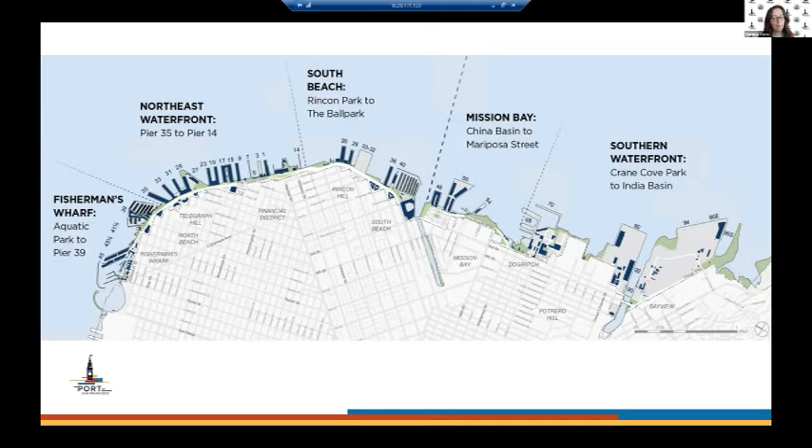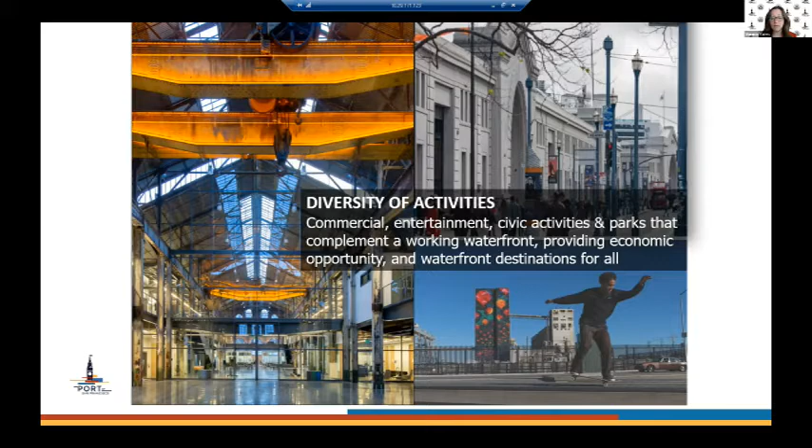So we support diversity of activities at the port, and that all complements a working waterfront and provides economic opportunities. Our working waterfront is along with commercial, entertainment, and civic activities, and a lot of parks. It's easy to forget that we are very much also a working maritime port. While we're a working maritime port, we are balancing public access to our maritime berthing on the piers. We're also working to expand water recreation and promote industrial economic development to protect the integrity of our southern waterfront cargo terminals.

And all the while we're doing that, we're looking to promote maritime environmental sustainability. One of the ways we're doing that is adding clean electric shore power to support the cruise industry.

So we have a wonderful, robust network of waterfront parks and open space, and it's mostly complete along our 7.5 miles of waterfront. And because it's mostly complete, we're focusing a lot on enhancing the recreational use and value we get from all that open space by having park activation and events.

We're adding wayfinding to provide information about all of our open space and to help guide people through it. That includes interpretive exhibits about port history and maritime industry. One of the projects I'll go over does support that goal. And all of our improvements contribute to the Bay Trail and the Water Trail that go through our property.

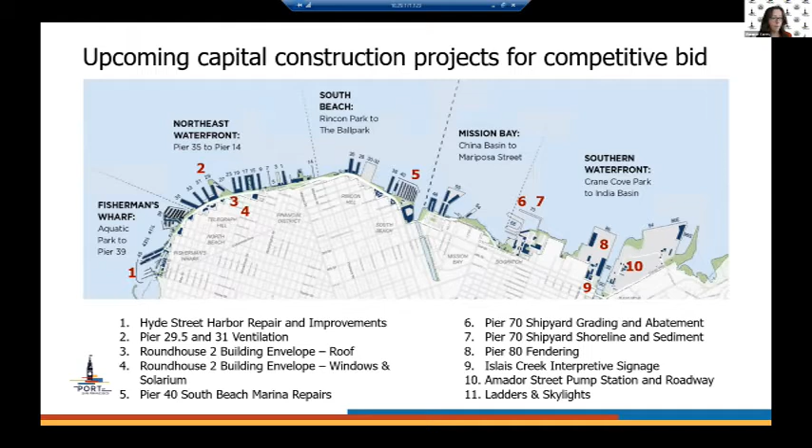So talking about each of these individually, going back again to take them in the same order from north to south: the Hyde Street Harbor and Repair Improvement Project addresses deferred maintenance at the Hyde Street Harbor. The scope to address that deferred maintenance includes concrete repair, welding, wooden whaler replacement, dock hardware replacement, pile sleeves, concrete float repair, and potable water line replacement. We plan to advertise that pretty soon in June of this year, and we estimate construction costs at just over $1 million.

Next project to the south is the Pier 29.5 and 31 ventilation project. This is to install a new ventilation system there. We have public parking in this area, which is why we need ventilation. The scope is mechanical ventilation, structural supports for this system, and electrical work for the carbon monoxide sensors. We plan to advertise that in September of this year and estimate construction at about $1.5 million.

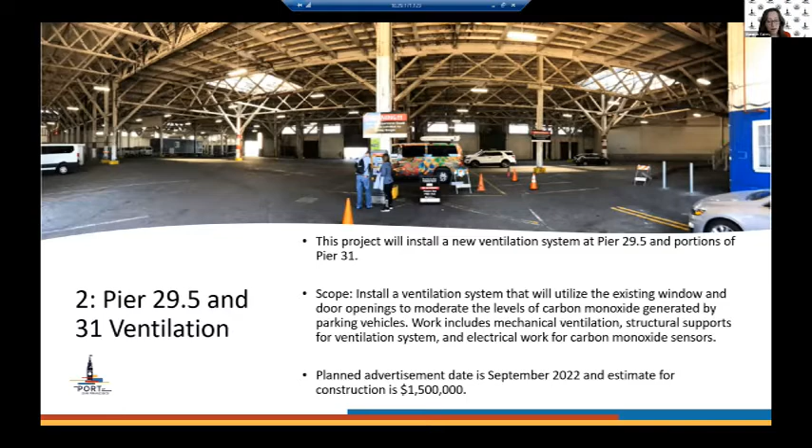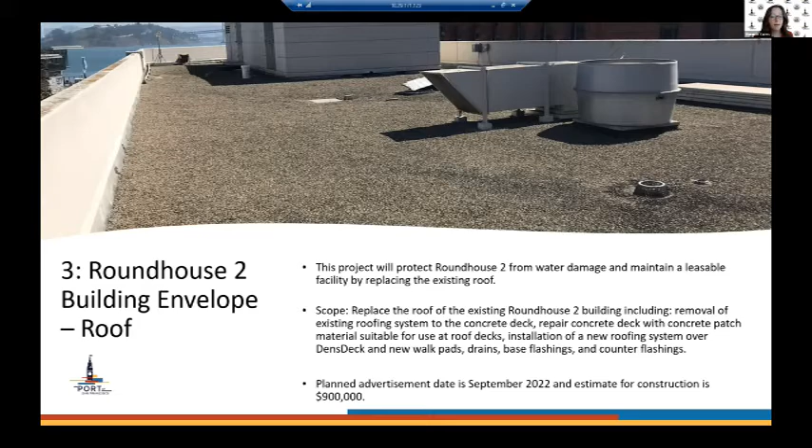Moving to the two Roundhouse 2 projects: there are 3 buildings in the Roundhouse complex, and this addresses the most recent one. It's a historic complex, but Roundhouse 2 is actually a building that was built in the 80s, though it's part of the whole historic complex, which makes it a little more complicated to do work on. The first Roundhouse 2 building envelope project is a roof replacement. The scope is to replace the roof, which involves removing the existing roof to the concrete deck, repairing that concrete deck, and installing a new roofing system. We plan to advertise that in September of this year and estimate construction at about $900,000.

The second Roundhouse 2 building envelope project is replacing the solarium and windows because water is coming in from all of these locations. The top photo shows the solarium; it's a pretty cool component of the building, but it does leak, so we're going to replace the entire solarium. The other thing is to replace the windows—the bottom picture shows there are a lot of windows in this building, and they need to be replaced since they've reached the end of their useful life. We plan to advertise this project in March of 2023, and we estimate construction will be about $5 million.

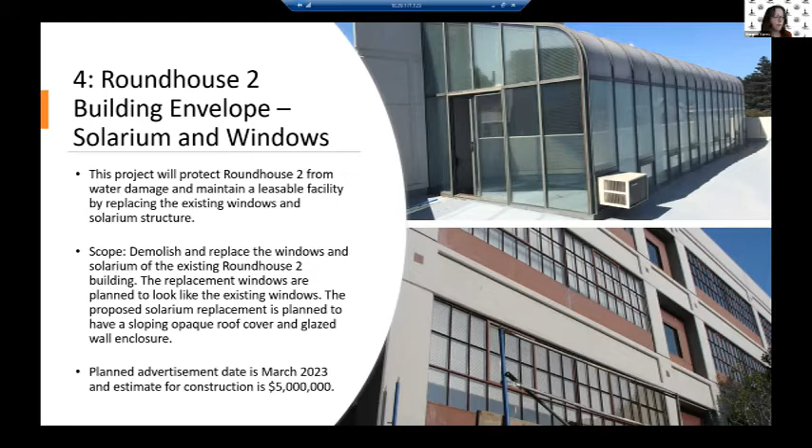Jumping much further south now to project number 5, which is the South Beach Marina Repair and Improvements Project. I think of this as a sister project to the Hyde Street Marina Repair and Improvements. We plan to advertise these separately, but they're going to go concurrently. This one will also be advertised in June 2022, and its construction estimate is a little over $2 million.

Now, starting our two Pier 70 shipyard projects. This is the grading and abatement project. The scope is to remove an underground pipeline that's no longer in use and is contaminated by PCBs, then regrading existing soil stockpiles on site. This picture shows those piles, which we'll use to regrade the unpaved area and cover it with gravel to create a level surface with positive drainage. This one's going out really soon. We're expecting to advertise it next month, and the estimate for construction is $1.3 million.

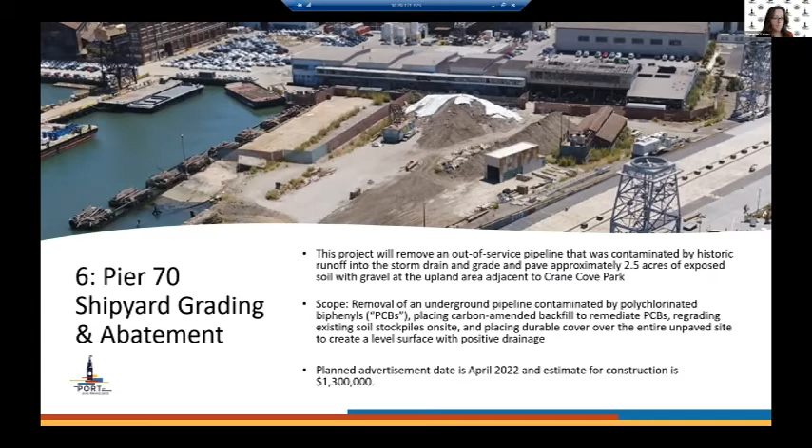The other project in this same location is the Pier 70 Shipyard Shoreline and Sediment Project. This is providing stable cover for the exposed shoreline just at the edge of the area shown here, near the piles of soil. We're going to install a shoreline revetment in front of those slipways, involving marine construction and in-water surveying. We plan to advertise that in April 2023 with an estimate of $1.2 million for that work.

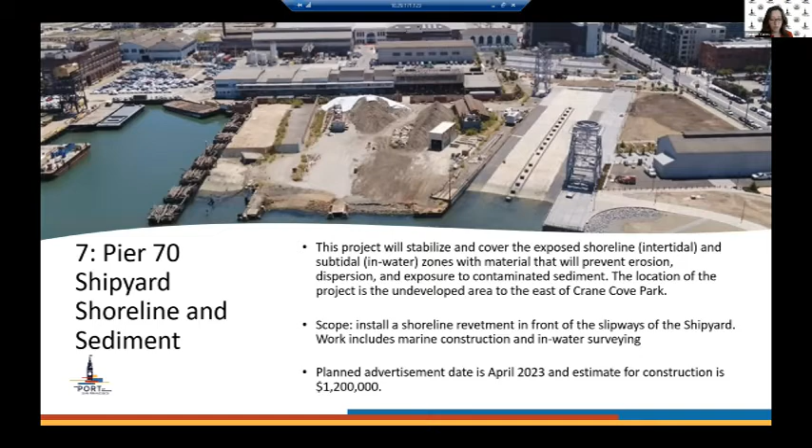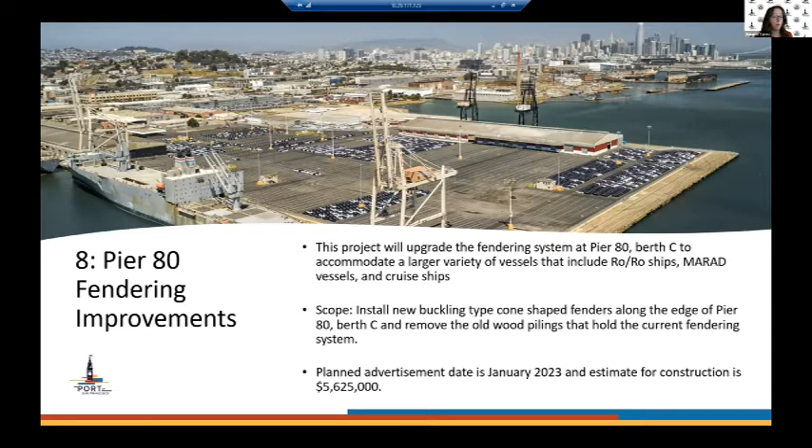Project 8 is Pier 80 fendering improvements. You can see this picture of Pier 80 with cars parked here. The project is to upgrade the fendering system to allow for a larger variety of vessels, including roll-on roll-off ships, MARAD vessels, and cruise ships. The scope is to install new buckling type cone-shaped fenders along the edge of Pier 80 Berth C and remove the old pilings. We expect to advertise this in January 2023, with construction estimated at a little over $5.6 million.

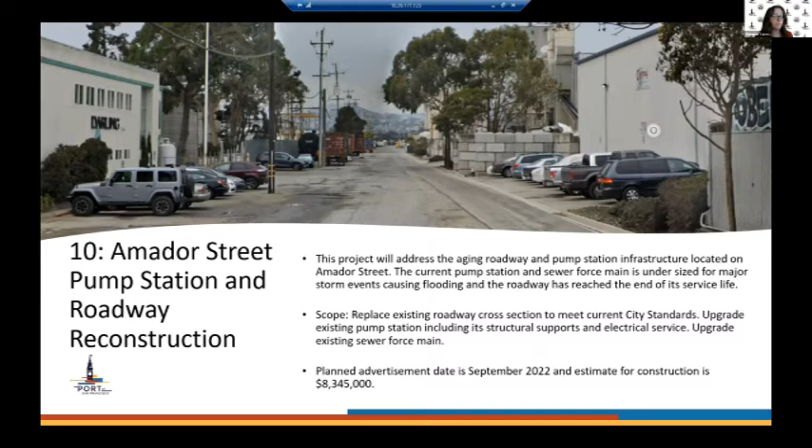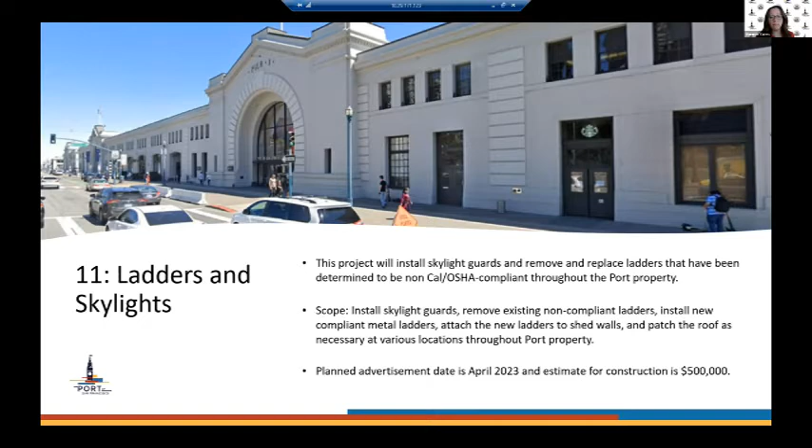There are two other things I wanted everyone to be aware of that aren't specific projects. The projects I went over, we expect to advertise for a competitive bid. I want to say that we may not do all those projects, and we may also do projects in addition to the ones I just went over. What I went over is what we know of and what we expect to be doing.

The port also does a lot of smaller projects through a job order contract, or JOC, and we use the Public Works JOC. I wanted everyone to be aware that we use that quite often for projects valued at under $706,000 for the construction contract. Tin-Chi Lee is the contact for the Public Works JOC.

They have an existing JOC that was competitively advertised that we're currently using, and they'll competitively advertise again for a new JOC. When they do it, they typically do a $5 million contract, or $3 million for the micro-LBE set-aside, and they start out with a 2-year term with an option to extend an additional 3 years for a total 5-year term.

I also wanted everybody to know about our as-needed engineering professional services contract. The port does a lot of our design work through this contract. We have 4 currently, and we're using them and will continue to, but they will expire and we'll use up all the money. So we're going to go out again to award 4 more contracts to four more teams, valued at probably $4 million each, with a term of another 4 years. We expect to do that pretty soon, going out to bid this spring, probably in May.